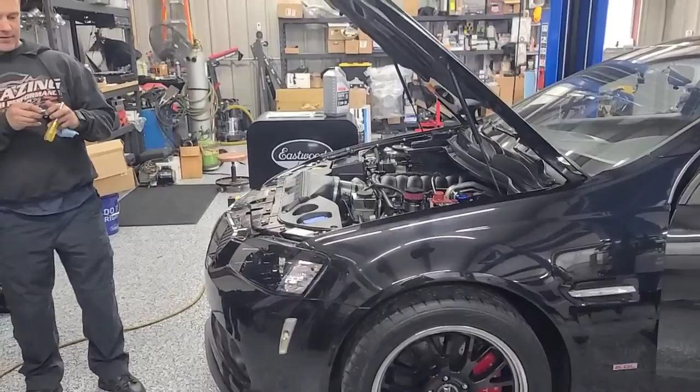This one had a problem with the previous shop's setup. What was going on with that, Dusty? It had a single bolt cam that was a performance grind, and they left the DOD lifters in place. They didn't delete any of that stuff. That just doesn't work, it's not how we do it. It failed after about 1,000 miles or so, how troublesome those lifters are. It had a broken valve spring on number 4, that's what was causing his issue.

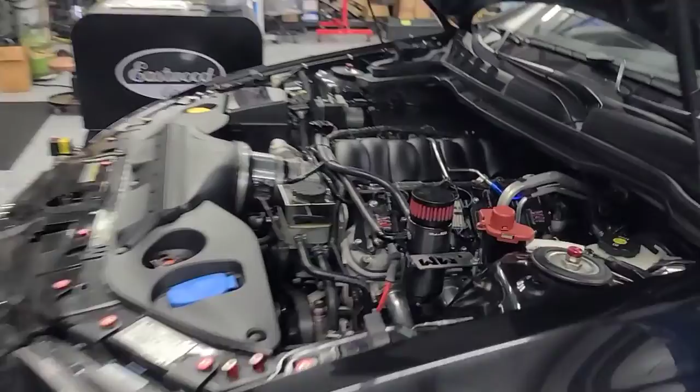So we replaced that, did a whole DOD delete, pulled the oil pan off and cleaned the screen. There was some valve seal material in the pan, where when the spring broke it ripped the seal off and went God knows where. So we cleaned all that out, plugged the oil pressure relief in the pan, and did our whole DOD delete oil pump.

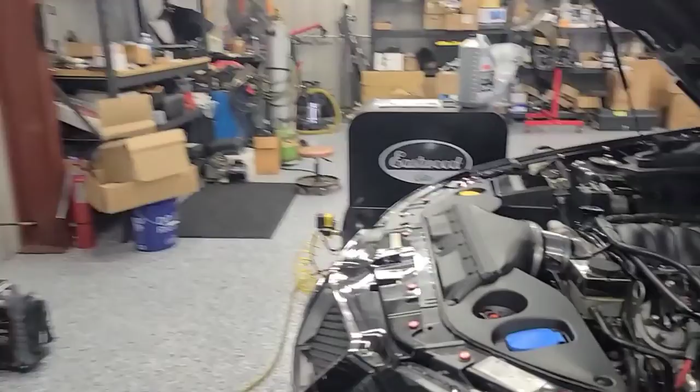Red hot cam, BTR LS3 stage 2, VCM intake, did a Mighty Mouse catch can. He's got Doug Thorley 1 3/4 headers on there, that's what it showed up with, and a whole solo exhaust system. Yep, it's got the shorty mid muffler, LS7 mass airflow, and he's going to stay on 93.

We did a 160 thermostat, just kind of some of the little things. Yep, shave the heads a little bit. Cut 35 off the heads, bump the compression up, stock head gaskets. So that'll be interesting, should run well. Yeah, it should be interesting.

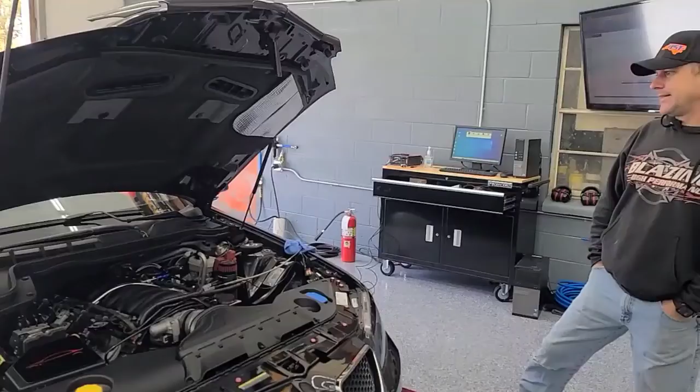It has 44,000 miles. We gave you the combo earlier in the video, but we want to get on the dyno today. We're waiting on a ported intake from Rick Crawford, but we wanted to get it all together and just kind of see where we're at.

It's good for data anytime you can back-to-back something anyway, but what we saw with this red hot cam Brian Tooley, which is the same as the LS3 version 2 stage 2, is more big power out of this thing. It was a bit surprising because this car has the Doug Thorley 1 3/4 tri-ys, which are pretty restrictive, necking everything down in the collector to almost 2 1/4, really small neck, and then it's got the 2 1/2 solo all the way out the back to solo J's.

Stock intake, ported throttle body, LS7 mass airflow, and it's on 93 octane. He doesn't have E85 where he's at. So 452.

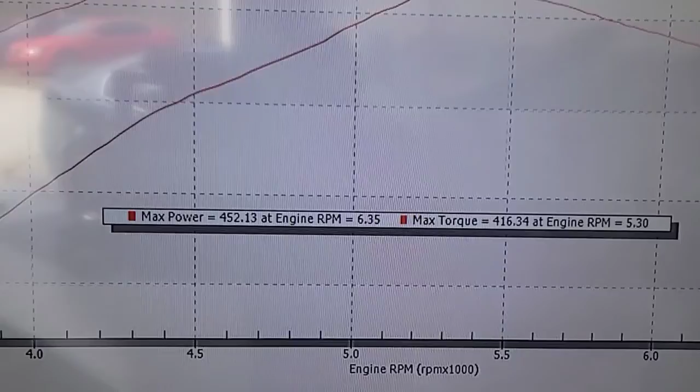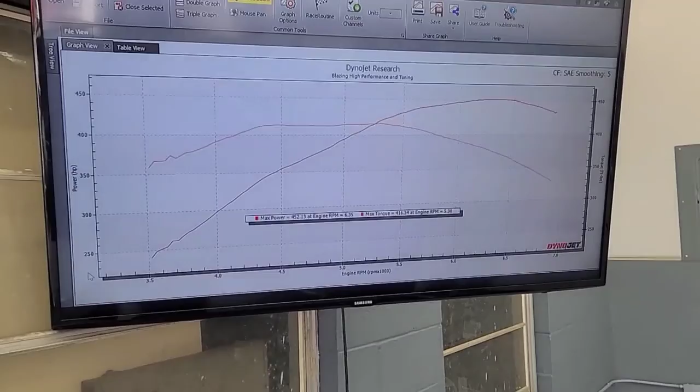Back cut LS3 intake valves, we put a back cut angle on those and milled the heads 35. Other than that, no port work, nothing like that, and it rewarded us pretty well up top. The car takes off about 55 and just really pulls hard, makes really good power.

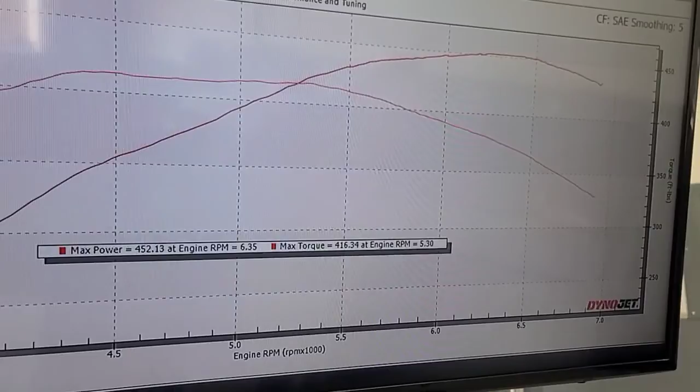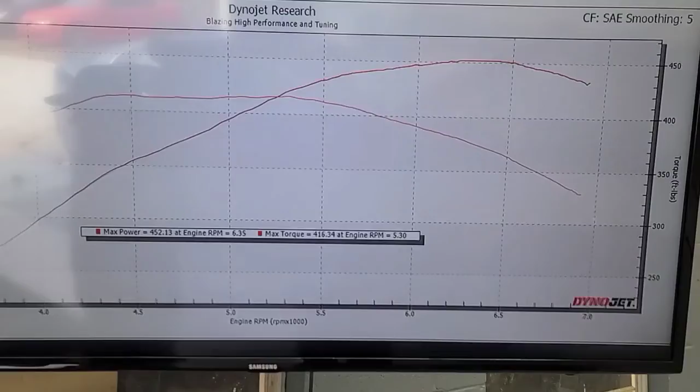452 is really good, I think, considering. And again, this is SAE, SAE power numbers. To be consistent with some of the numbers - numbers are numbers, just a number, we all get that. But then you see somebody that posts a dyno sheet, if this was standard day today it'd be 465. But we just try to stay consistent on SAE.

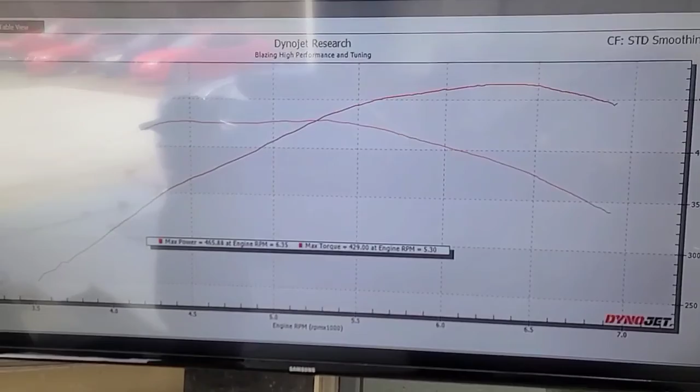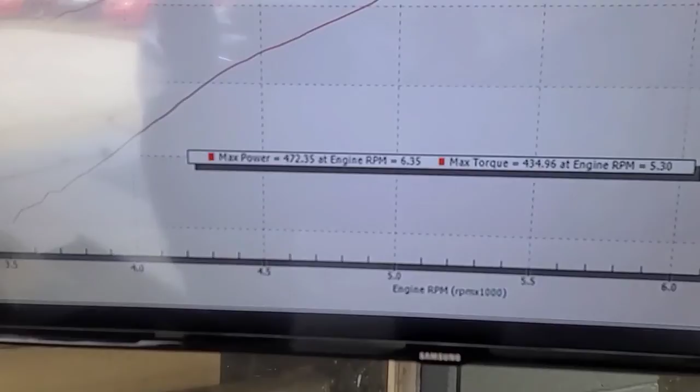And today was a very good day weather-wise, it's cool, low humidity, over 29.92 atmospheric pressure. So uncorrected numbers today would be 472. That's what the car's actually putting down right now today, because it's a pretty cool day here in North Carolina.

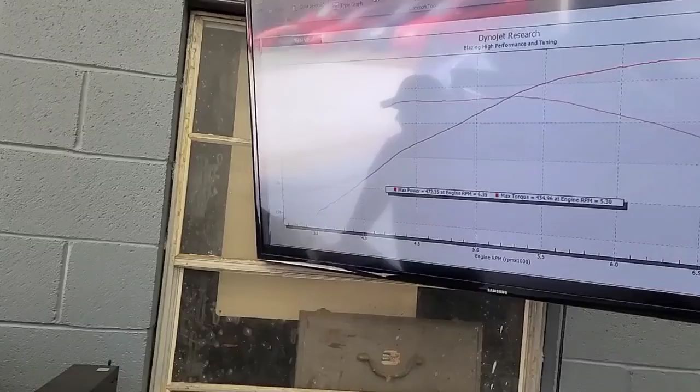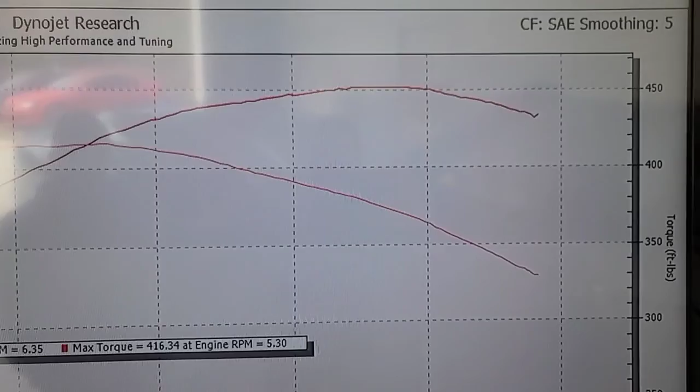53 degrees. This is the second Red Hot BTR2 version 2 cam we've done, and the reason is we're trying to get as much data as we can. The thing we're continuously seeing is how the power continues so good, and that's almost 7,000 RPM. While it is on a decline, it's not dropping off like the older version 1 did.

That was the issue with the BTR2 original version, it just made good torque, but above 6,000 it was already on the decline, and by 6,500 it was dropped off completely, just about.

And we could see that at the track. We did a bunch of track testing too. We don't just play on the dyno, we go to the track with these things, because that's what matters, where the rubber meets the road. But we were noticing that we were losing some mile an hour over some of the other setups, with ET close, but the mile an hour on the top of the track was down probably 4 or 5, because compared to some of those other ones, the power was falling off up top.

So we think we backed this data up. We had April's car in here. There's a video you can search for on April's car, which is now sold. It made 459, and it was on E85 with ported heads, some of the earlier Rick Crawford heads. But it had debatably a better intake.

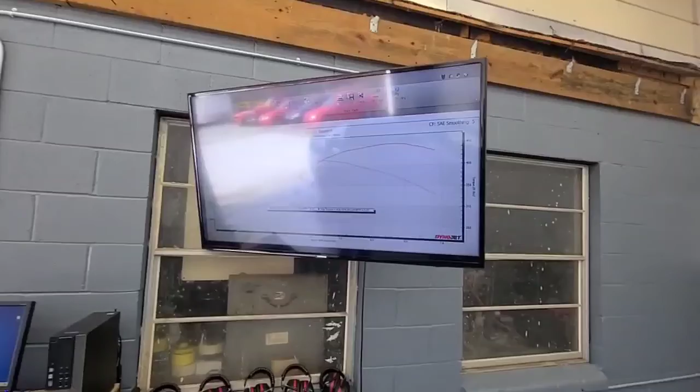I mean, better headers, definitely I would say better headers. But it had a stock intake as well, so it had 140... 49 I think when we sold it, with 9,000 miles on it. This one has 40,000 miles, so it's in better shape. We didn't do a valve job on these heads, they were pretty in good shape. But like I said, we did back cut the intakes, and that fixed flow up a little bit.

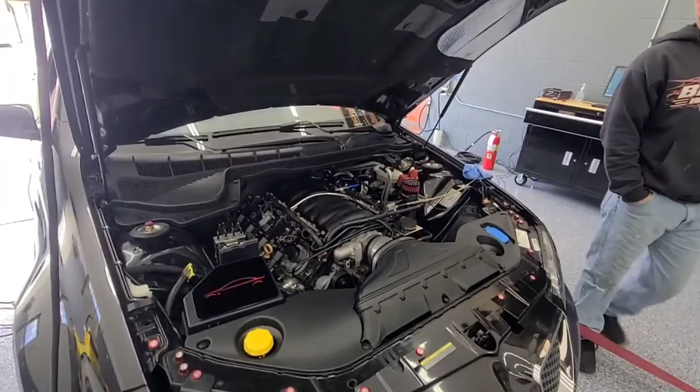That shows this cam is a very good setup for all motor setups for sure. We haven't tried it on boost, whether it be supercharged or turbo, and we haven't sprayed one of these yet. But it is showing that it's a good cam, and that was one of the reasons we're going over a little bit more on this one than normal, because this was our backup data for April's car, to make sure it wasn't a fluke kind of deal, and it's obviously not. This cam just makes big power.

We know from testing that on an all-motor car, E85 is worth 2 to 3%. So the number difference, she did have ported heads, but that kind of goes to show a bit. I'm not sure it's apples to apples, because I don't think we're getting the exhaust out of the car as efficiently as April's was. If you're not getting it out, it's not going to reflect how much better you can get it in, because it's going to back up in there. So I'm not sure it's apples to apples with the header setup we have, but I will say that if we put E85 on this car and picked up 2%, it'd be almost 10 horsepower, pretty easy, 8 to 10.

Consistency on this cam, it shows a lot. It shows this is making, this is a really good cam, and will probably be good for people that want a pretty extreme setup. Not extreme, but a pretty good setup for an all motor, or we're going to try boost later. This is going to be our go-to, I think.

I would say it likes a little gear, and a 3 to 3600 converter is really happy with it. It helps get out of the hole. Not that it doesn't make torque, but when you have this much cam and the drivability, a little converter makes the world of difference. So anyways, we may be back.